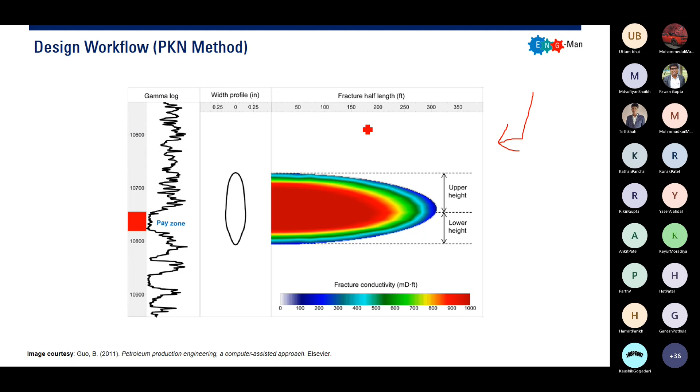Okay. And after this design, we are talking about fracture operation. So first we talk about the equipment setup. Okay, so if we have the wellhead here, the heart of the fracture job is the blender and the transfer pump maybe. Okay, especially the blender.

So we have a water tank. It will provide the water from the station usually or from the river, and it will enter the transfer pump. Okay, and it will enter the blender, the mixer, where it will mix the chemicals and the proppant. Okay, proppant will enter the proppant conveyor, will be stored in the hopper, and it will go to the blender. The blender will mix the chemicals, water, and the proppant, and it will still be in the low

pressure line. It will enter the manifold. Okay, and it will go to the frac pump. From the low pressure line, you can see the dashed arrow to the bold arrow. It has a high pressure line, high pressure after being pumped by the frac pump. And then of course it will go to the well. And after the operation, we will have flowback. Okay, stored in this tank.

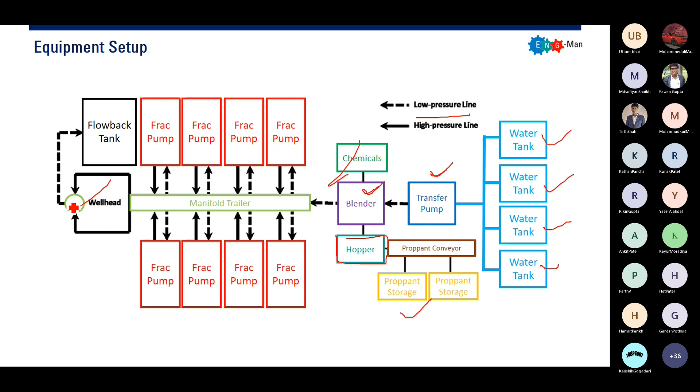Right, and then this is the operation visualization. First, we have our well. Our well is ready. This is our reservoir. This is our perforation. Okay, first we pump thin fluid. Thin fluid is pumped down the well. Maybe it's water or maybe slick water. Okay, fluid with low viscosity, relatively low viscosity. We inject thin fluid.

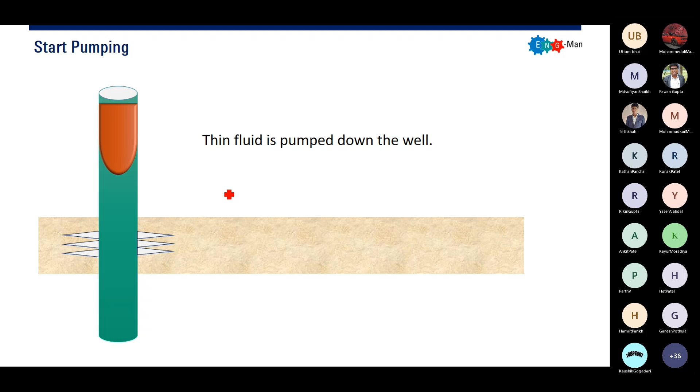Okay, and we fill the wellbore with the thin fluid, usually slick water or linear gel. It will initiate the fracture. It will reduce the friction, especially in the tubing and in the perforation. And at the same time, it will cool down the hot formation and keep fracture fluid viscosity high. Okay, to cool down the formation, the reservoir.

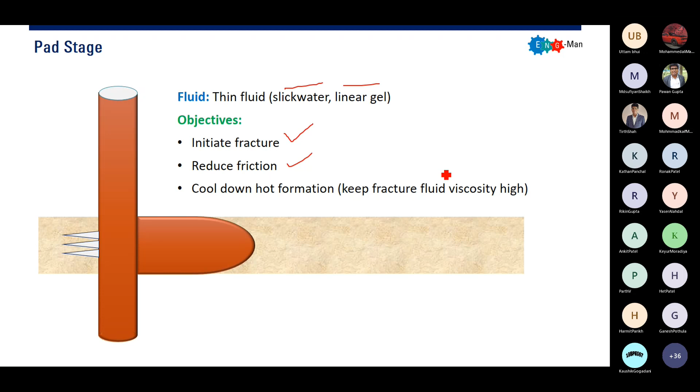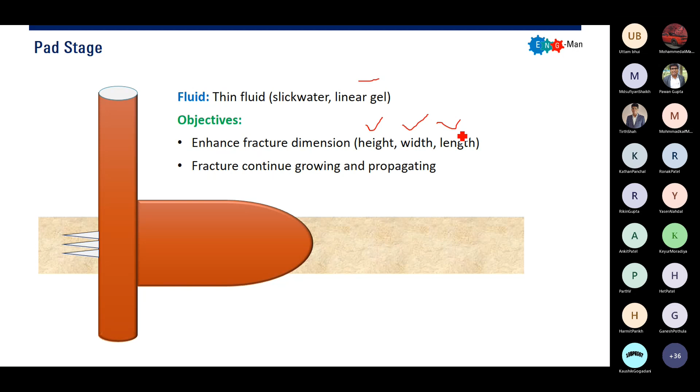And then it continues. Okay, still thin fluid, slick water with linear gel. Now it enhances the fracture dimension. When talking about the fracture dimension, I mean height, width, and length at the same time. And the fracture will continue growing and propagating.

And now we will use crosslink gel fluid. Why? Because now we will transport the proppant. So we create crosslink gel at the surface and we pump it down the hole. It is staged from low to high proppant concentration. Okay, so that the low concentration will be accumulated here, and we will have the highest concentration here. Because the low concentration will go first and it will accumulate here.

Okay, that's the logic. And we place proppant as per pumping schedule to obtain the desired conductivity. So the pumping schedule is actually the table I said before. That's called pumping schedule. So we place the proppant as per pumping schedule to obtain desired conductivity. And the wellbore is filled with the proppant.

Okay, please be careful so that we avoid screen out. So if we have screen out, the proppant will accumulate here and it will totally plug the wellbore so that we cannot add more proppant and we cannot achieve the fracture. That's called screen out. Okay, the proppant is screened out. We end, we cannot continue.

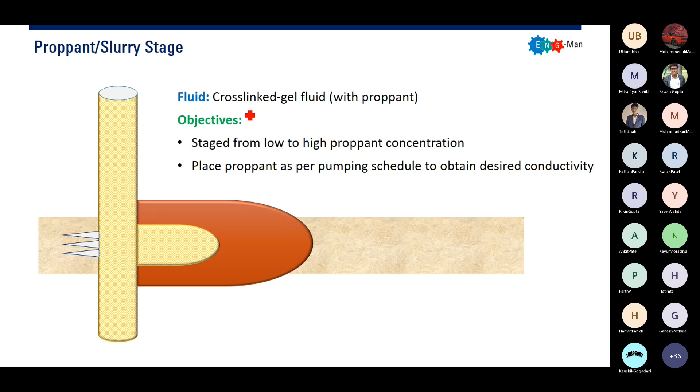And then what happened? Then we flush. Okay, we flush the wellbore using water or KCl water or slick water or low gel loading fluid to displace the proppant from the wellbore to the fracture. We don't want proppant accumulation inside the wellbore when we produce the well. And please make sure we under-displace.

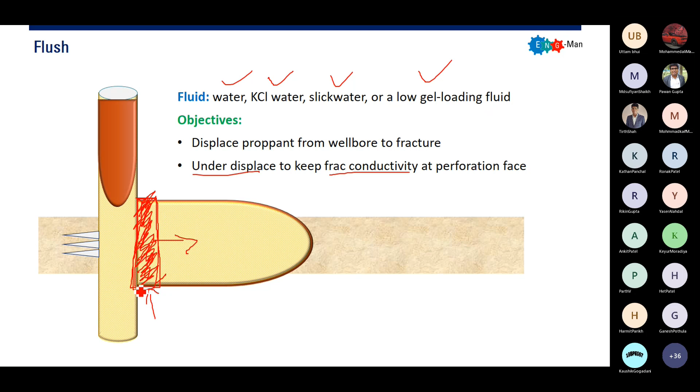Okay, under displace to keep the fracture conductivity at the perforation face. Why under displace? So that the proppant pack will stay here. If you over displace, then the proppant in this zone will be pushed farther into the reservoir, and we will lose our proppant in this zone. It is called choked proppant, in this zone, if you over displace the proppant. So please make sure you under displace, so that you will still have a proppant pack on the sand face.

Okay, and again we will shut in the well. We allow the fracture to close. The fracture will close due to the gel break and fluid leak off. As you can see, we use breaker, so the gel will break, so the gel and the polymer will leak off into the reservoir, and at the same time the fracture will close, but not totally close.

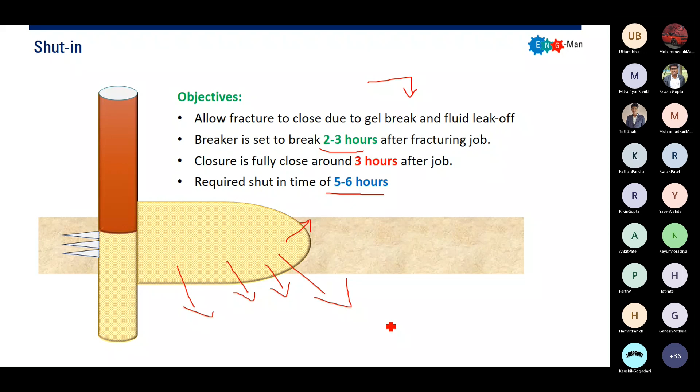Breaker is set to break 2 to 3 hours after the fracturing job, and the fracture will fully close around 3 hours after the job. So usually we shut in the well for 5 to 6 hours after the fracturing job. We just shut in and we allow all the gel to break and all the fluid to leak off into the reservoir. So now we will have a clean proppant pack, a clean proppant bed inside the fracture.

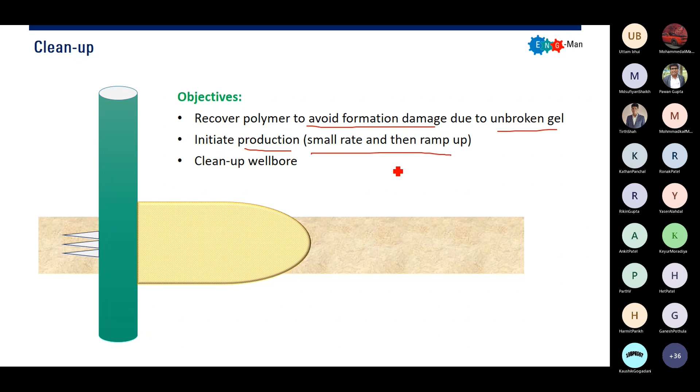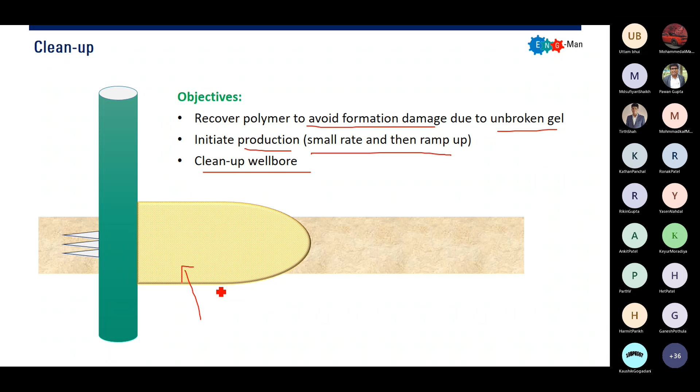And lastly, we clean up. We produce the well. We recover the remaining polymer to avoid formation damage due to unbroken gel, and we initiate production. Please be advised that we will start from a small rate and then ramp up the rate, and we clean up the wellbore. So we now have a clean, quote unquote dry, proppant pack like this one to provide high productivity for our well.

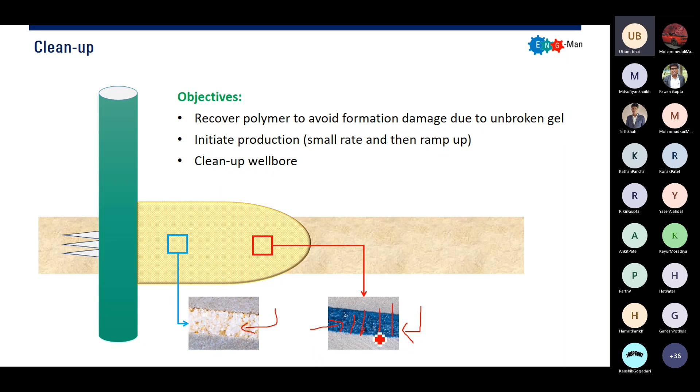And you can see if we have clean or quote unquote dry, it is like this. It will give high conductivity. But if your gel is unbroken, then it will be like this. You will still have low permeability, low conductivity in this zone because of the gel. That's why we desire the gel to be broken by the breaker, and we clean up to recover the remaining gel.

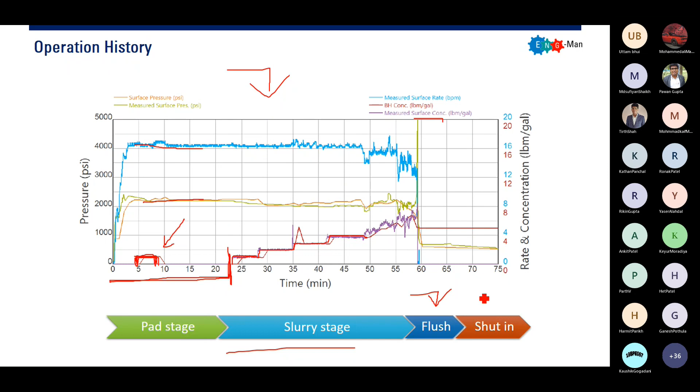And after 20 minutes of pad stage, we enter the slurry stage. We inject the proppant and we increase the concentration. You can see the staircase of the proppant concentration, right? We increase the concentration, but at a constant flow rate, and we continue to increase the concentration as per our pumping schedule. And after that, we flush. Again, when we flush, it means zero proppant concentration. And after that, shut in. That's quite straightforward. And during the fracturing operation, we do fracturing pressure analysis.